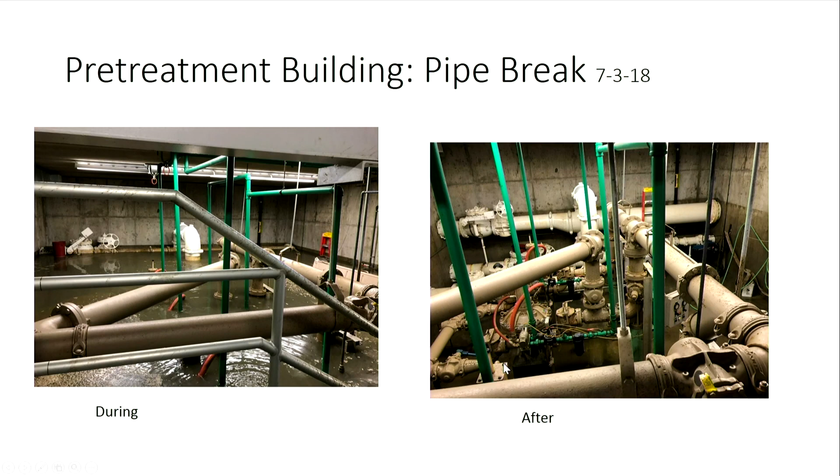So during this incident, electrical components went underwater. Typically when electrical components go underwater, they all need new wiring, and everything needs to be replaced with new controllers and those types of items. Again, on the left is during the incident, and on the right is after.

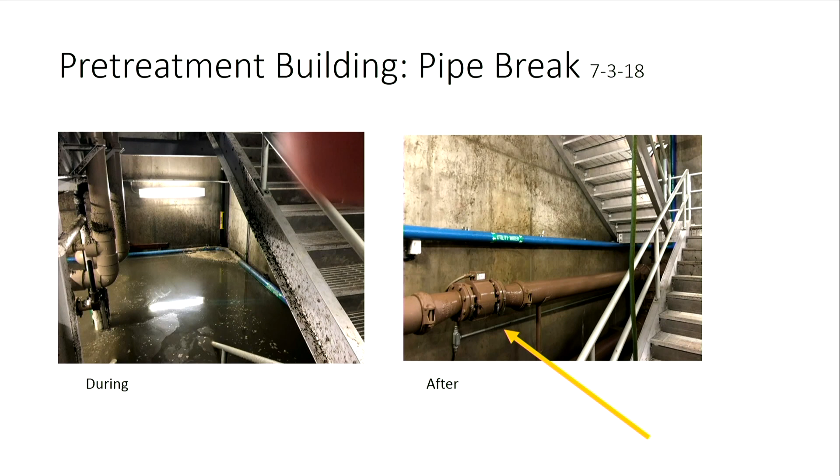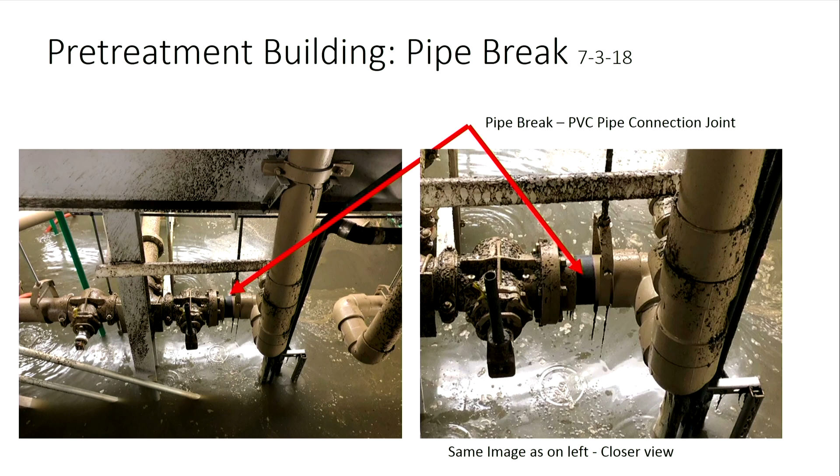So what happened, if you look on the left picture, you'll see that gray - that's a PVC pipe, that's a joint. It failed, it came apart, leading to what's shown in the next picture. When that pushed apart, it actually broke the vertical pipe that went up, cracking that pipe when the joint failed. That's what caused the water to get down into the basement and cause the issues.

But that was just the start, really. When that broke, we came on site about 8 p.m. that night. We thought it was fully contained within there, so we didn't think we were going to be having any sort of discharge at that time.

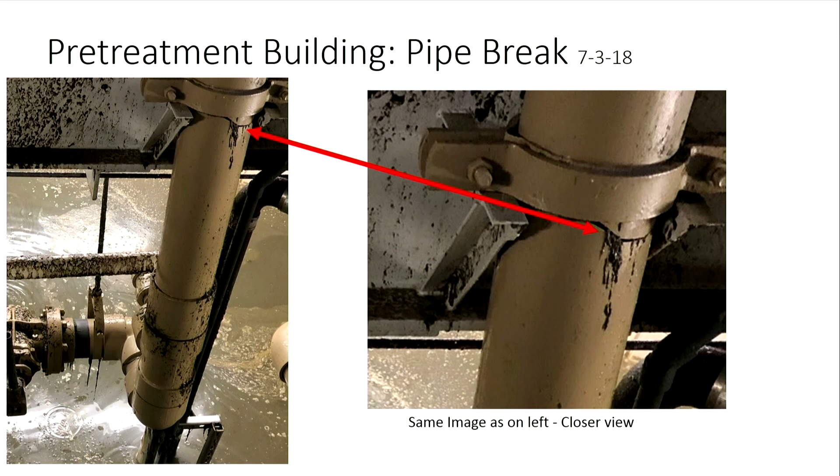This is just more pictures of some of what was done post. We got the joint put back together. We've added restraints to it to restrain the joints while we're looking into the permanent repair fix for that piping.

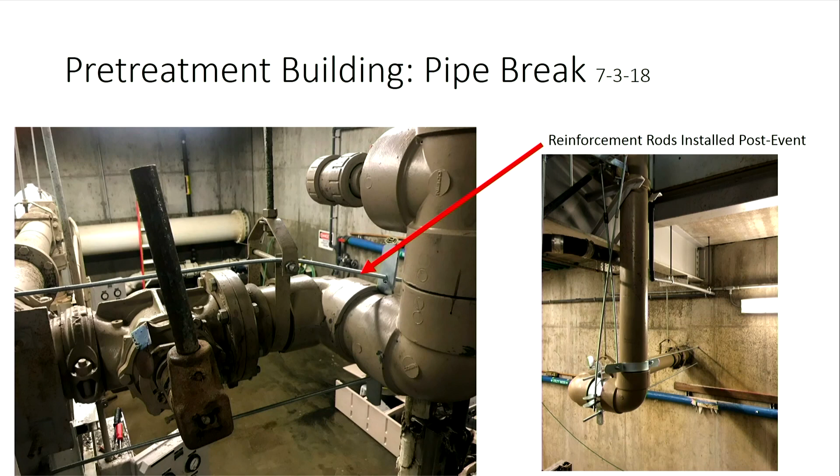What happened was when that went underwater, we started to have these - even though the pumps are on the wall down in the basement below - these pumps in the pit started to fail. So we were having the pumps stay on and then they would come off. We could not keep up with the incoming flow. Ultimately we got inundated where we couldn't keep up, and we had to discharge from the site.

Once we got the pumps pulled, checked them out, and got the pumps online - from about 1 a.m. to 4 a.m. until the pumps came back online, we were discharging from the plant, not only out a pump but right out the doors that are open on the end of the building. Just to add to it, it's a redundant system, so we need one of the 3 pumps to be working in order for the plant to be functioning, and we had all 3 that went out.

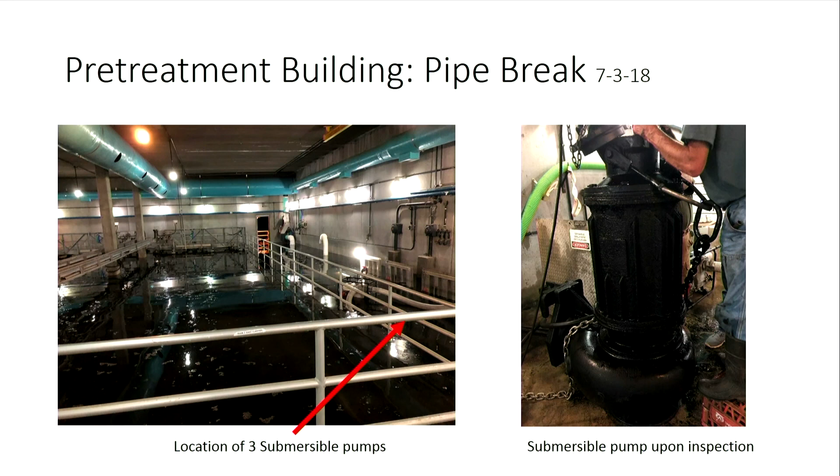So another picture in the lower level - these are the controls for the pumps in the basement. All those controls and the wiring have been replaced to keep them operational. There are other repairs with electrical components going on down there, but those 3 controllers have been replaced.

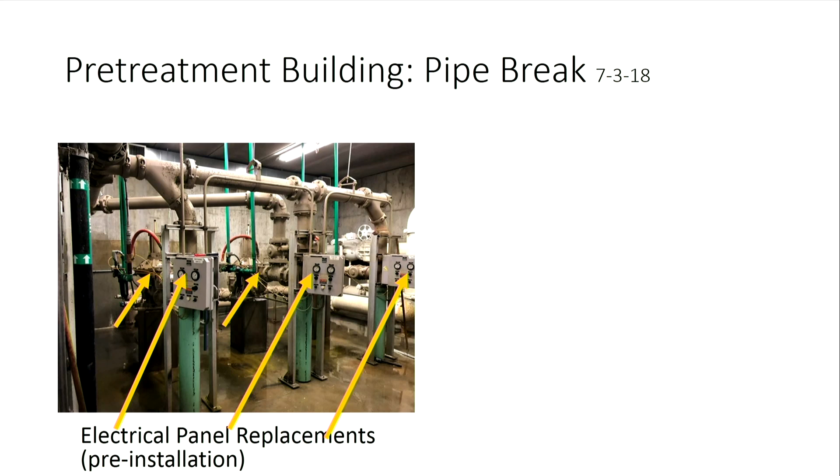So where we're at, the new control panels are about $5,000 each. We don't have the numbers on the cost, so $10,000 to $30,000 to probably redo the wiring, and then there'll be costs related to restraining the joints. That's our temporary fix - we're looking at that to see what the permanent fix is.

We're not sure if that piping was there actually when the plant came online, or if it was added at some point in the future, so we're also looking into that. We know it's been there for a long time, functioning that way for many years, but certainly we had a failure at that location.

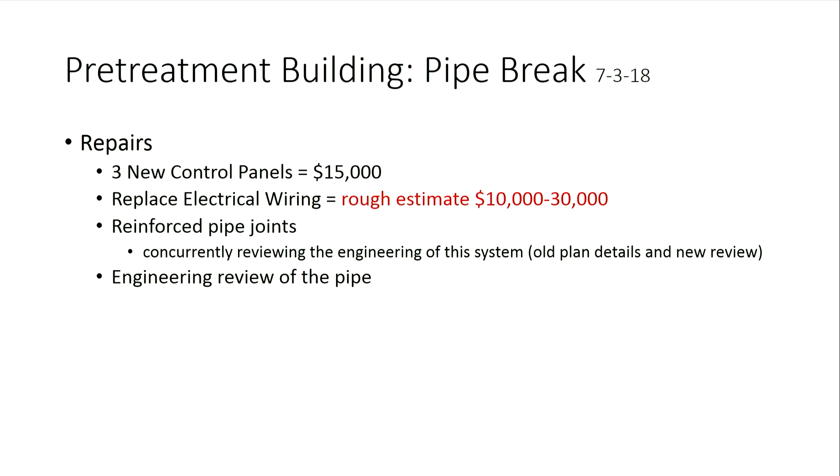So engineering review of that pipe. It failed, we notified the MPCA, and then we notified downstream, and then we began with the press releases and monitoring of the water quality and the testing within the river.

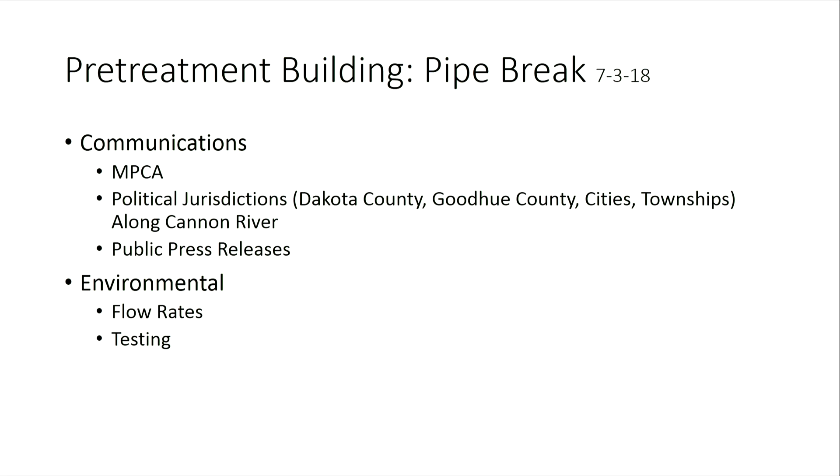So this kind of goes back - this would be our first incident in the BAF building in January. Maintenance work was going on in that building. There was a plug in the basement related to the maintenance work going on. The plug came out, filling the lower level about 5 feet.

There was very minimal discharge. It was from the overland pipe that was used to pump out of the basement, so a very, very limited amount of water was discharged. Once we got that pumped out, most items - but some of the electronic stuff - came back online, so the facility was running.

At that time, we declared an emergency because of the costs and getting things put back together. When we declared the emergency, we were estimating around $200,000. We think actual costs are around $174,000 for that incident. We're working with insurance on that to close it out.

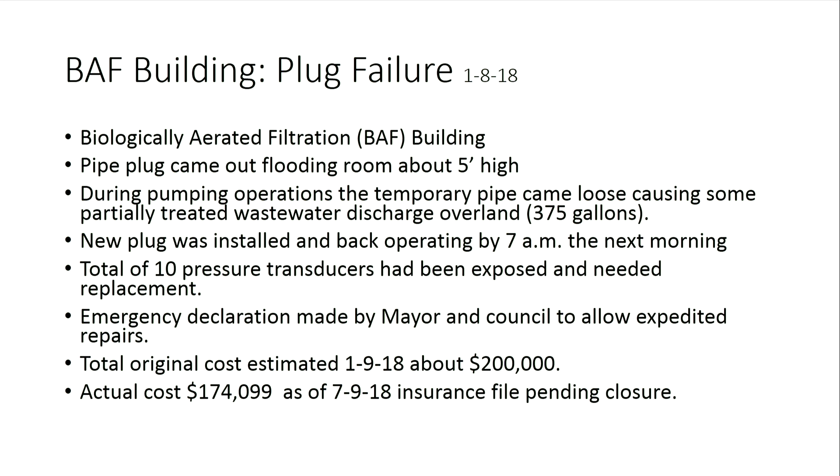So this is the picture on the left, when the basement water had come down - the arrows show up on the pipe or on the columns where the high water mark was in the basement. The illustration on the right shows it's all cleaned up - everything's functioning now in the basement, everything's been repaired.

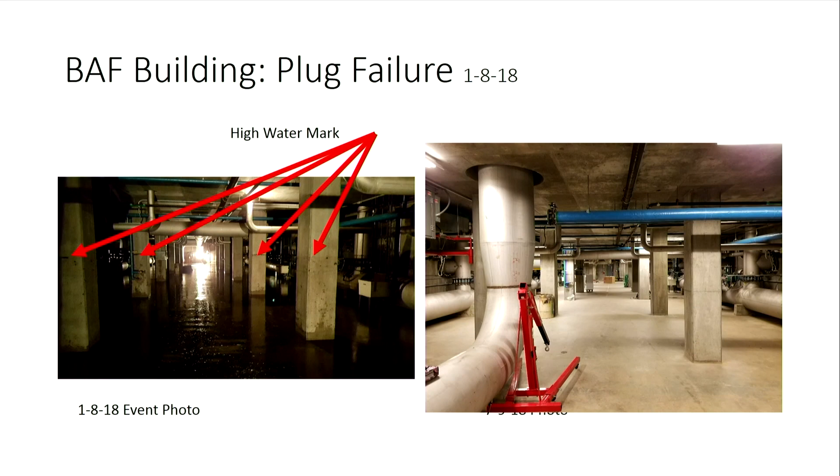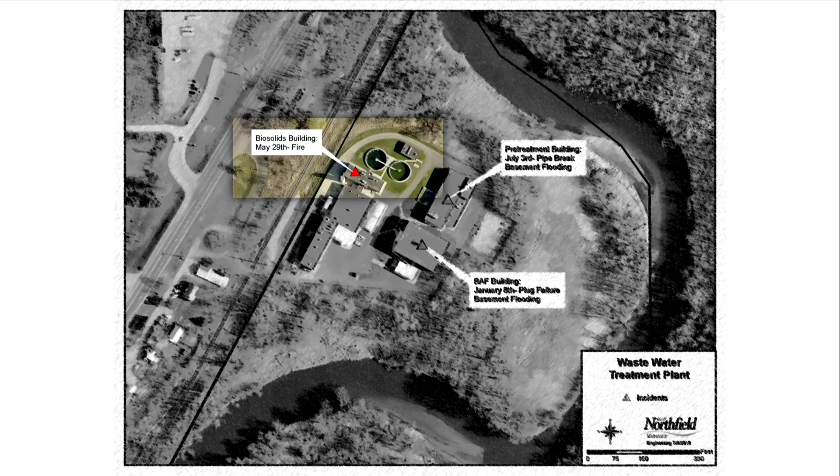May 29th - separate buildings, separate processes. The Biosolids Building, our sludge processing, had a fire on May 29th. Like our normal process, we ended later in the afternoon and cleaned up the room. We received process alarms that evening around 9:30 to respond to the fire.

We'll get into more of this at the next meeting. Fire department was on site around 9:50 that evening. We did have to shut down power to the UV - the UV power is fed through that building - so that process went down for about 45 minutes until we could reactivate the power due to the fire.

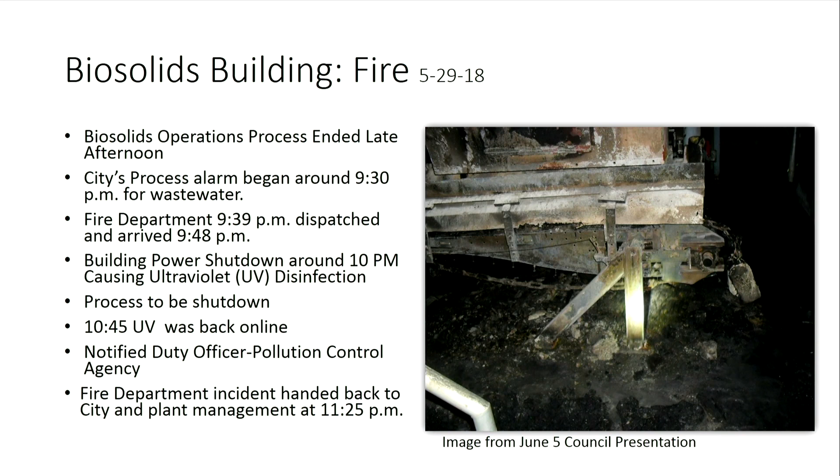Again, we notified the Pollution Control Agency, and then from when the fire department left, we've been working with the league and getting everything done with the repairs. The fire marshal did not investigate this; there's no thought of foul play related to the fire. We're reviewing the investigation report, so we'll have more at the next council meeting.

We're proposing to discuss more details of the report. We'll talk a little bit more about the alarms also. And we don't believe from an operational standpoint that there was any negligence related to where the fire occurred.

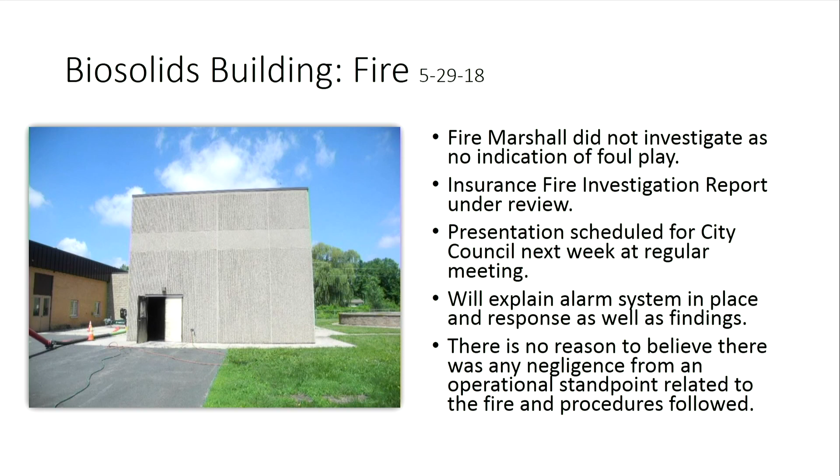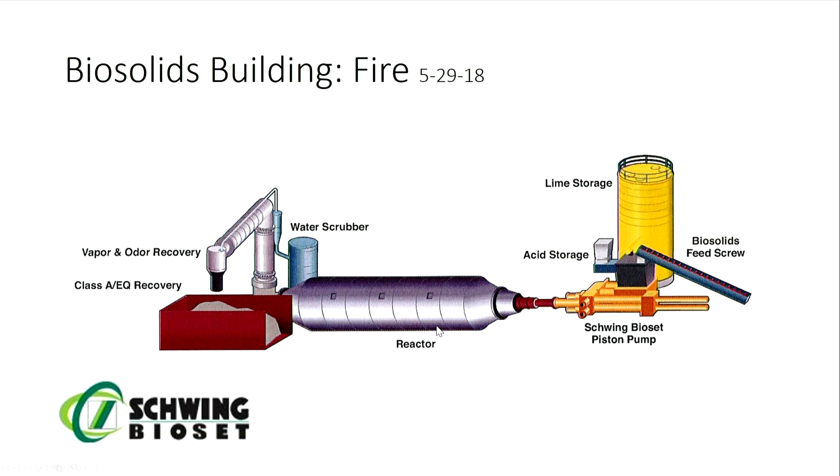It's different, but it's similar. It uses lime. The solids are mixed together, and it goes through, pumped into this reactor where it's heated, and then it comes out. If you work from the right side, that's where it starts, where the biosolids come in. It's mixed with the lime, then it goes into the reactor where it's heated up, and you get your ultimate end product — a Class A end product.

We believe this is one that was contemplated in our facility plan. It's one we've been looking at. We believe this is a different process than the one we have out there. It still uses lime, but it meets our Class A EQ.

Anytime we buy new equipment, we're looking at 20-year projections, so we've sized it to make sure we can accommodate growth into the future. We believe it'll operate at less time until we get to the end of that growth period, and it'll be better for the environment due to the energy.

So this equipment has been ordered. It's 4 to 7 months before we would get the equipment, so we're going through the design right now. We've got the equipment identified, so we'll have an installation-out-for-bid type contract coming forward to council as we continue to work through this.

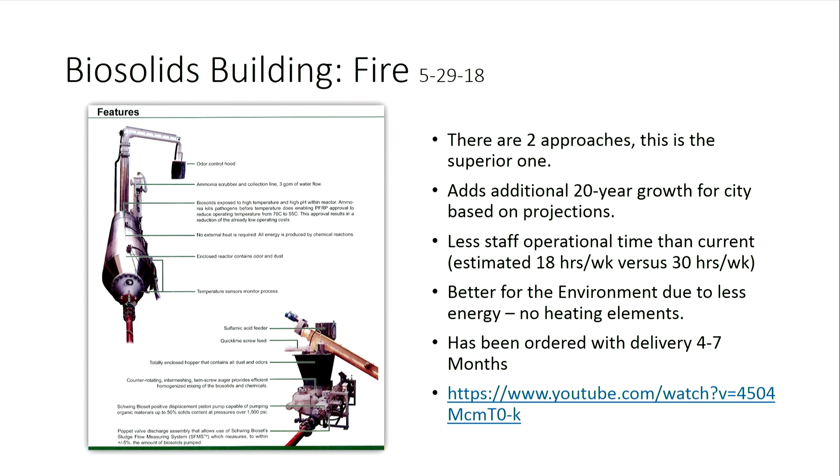Cost — so for where we're at with the fire: the new equipment, let's look at the left column. That's where we're at with the left column. The middle column is the cost to replace the existing.

This would be what's covered by the insurance, just related to the equipment that was damaged within the fire. The third column on the right is the cost of the equipment out of the facility study in 2015, and you can see the note when it's inflated up to 2021, when the equipment was proposed to be replaced.

So the new process equipment is about $4.2 million. There are other items — a scrubber, cleaning of the facility, a new blower, a new chemical feed system. We have contingencies in there, so we're looking at $4.5 million for the new equipment.

Insurance — so just to replace what we have out there. It really didn't look at expansion; it would just be what's in place. So it's really within about $100,000. We're still working through that with the league to determine if everything is 100% covered, or if there's some salvage dollar value, but we don't think there's going to be significant differences there. The third column is really where the $3.5 million roughly was estimated in 2021.

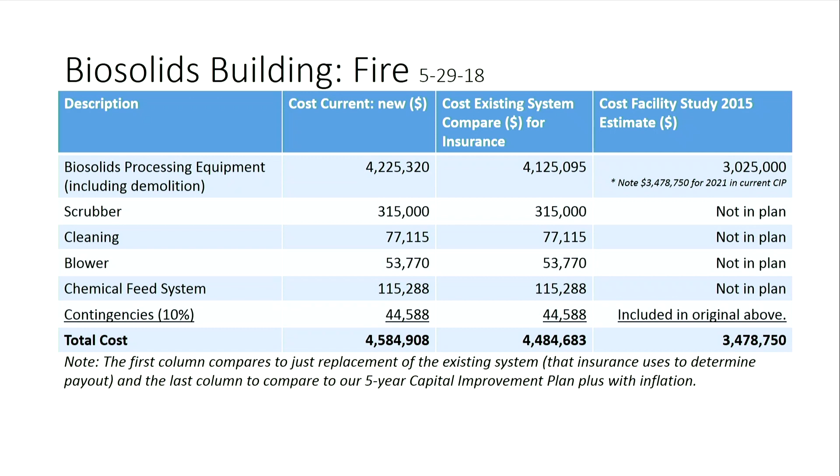So where we're at with costs and funding: pretreatment is probably in the 25 to 45 range to get the pretreatment facility and the wiring and some of the controllers back operational. The incident at the BAF building is about $175,000.

Because we don't have the hauling costs and that type of stuff, it could be in the range of $6 million related to this claim. We have portable equipment that should be coming in the next week and a half. We know we have approval — we're hauling to Met Council, so if something were to happen where they would no longer take us, we have a temporary process set up so we can continue to process sludge.

So we have that going, so we'll be getting that equipment set up so we can still produce our products.

From our insurance perspective, really our maximum out of pocket is $100,000. Then there's stuff that won't be covered by insurance, so that's taken as that difference — that's at $100,225. I think we're still working on that, so the numbers can vary, but right now we're looking at $200,000 out of pocket for this.

Related to this, they're wondering if we're going to see a big insurance spike in premium cost. Related to this property stuff, there's no experience modification related to how the plan is set up within the pool, related to the League of Minnesota Cities. Certainly, if they look broadly and see a lot of incidents across wastewater plants, the whole pool could see that. But right now, as an individual city, we're not proposing to see an increase related to the incident.

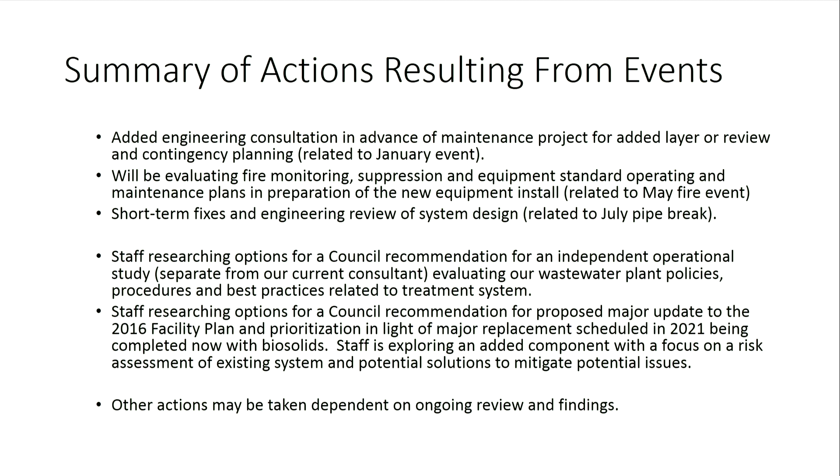That would be another item, and depending on anything else, we'd find out if there are other recommended actions. We think the incidents are separate and unrelated. We haven't seen any correlation of cause, like whether the fire caused this issue in pretreatment. We're not seeing that related to any of the incidents. We think they're all separate and unrelated.

They're still serious. We want to continue to look to mitigate our risks in the future to make sure downstream we're doing the best we can to operate the facility, to minimize releases in the future. That's certainly a goal of every wastewater plant operation, that you don't have those types of things come up, and that's what we're trying to operate the facility as.

The plant is running. It was majorly upgraded in 2002, so it's not at the end of its life. We're making improvements to the facility. There's going to be more improvements in the future to keep it operating, and more investments into it, but it's still operating.

From here, we're looking at some tours to show kind of where some of the incidents were, so you get a visual of what's going on up at the plant. Then on this Friday, July 13th, and again on July 17th, we'll have another update related to the fire, the report, and the investigation on the fire.